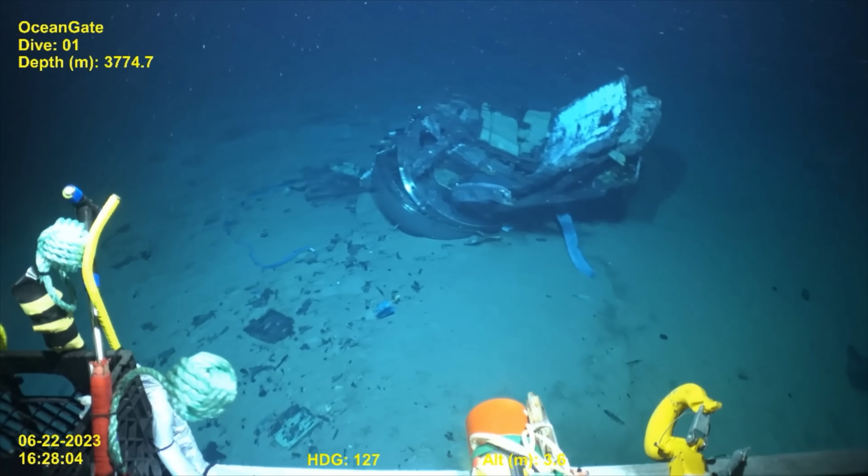He wanted me to be the pilot that runs the Titanic missions. And I told him I'm not getting in it. Hard to believe it's already been over a year since the OceanGate Titan disaster, and now we have hearings from the Coast Guard with key witness testimony from people involved, and we've learned a ton.

Now, I want to focus this video on the testimony of Tony Nissen, who's the chief engineer of the Titan program. And a lot of what he's had to say is pretty shocking. Some of it we knew, some of it is new. The reason why we're doing this video is because it's really important in engineering, whenever something goes wrong, to learn how to address it, because that's how progress is made. So let's see if we can figure this out together.

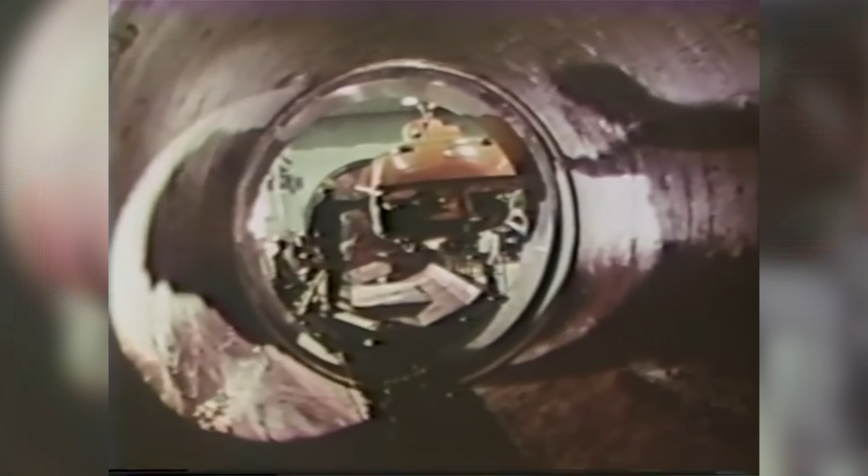The next key point is testing at the Deep Ocean Test Facility in Annapolis, Maryland, something that they were going to do, but ultimately did not. We wanted to hydrostatically test, so we wanted to fill it with fluid, but there was going to be computers inside because we had to measure data and they needed to isolate that from the water. And the Deep Ocean Test Facility wasn't comfortable with us doing that.

I submitted a plan, a request to be able to do this. They came back with, we don't know if we want to do that. This is one of those cases where Stockton got fed up and said, then we're not going. And it was going to push us like another year. Like I couldn't get it done fast enough.

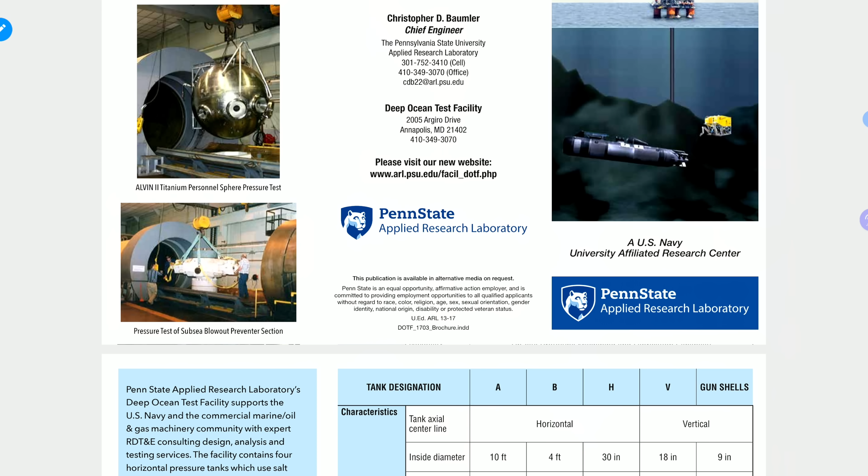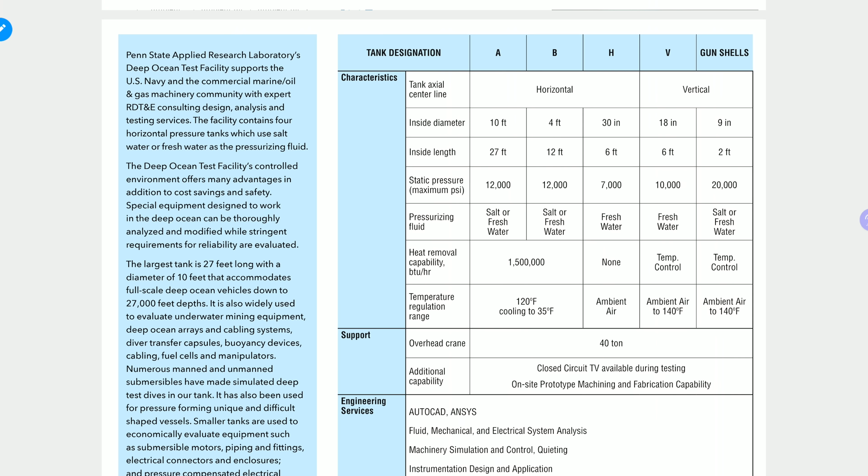The Deep Ocean Test Facility is exactly where this sort of testing should be taking place. In fact, the US Navy has performed testing of this variety for this very reason, and they did not. And they claimed that because of their instrumentation and computers, the facility had objections to doing a hydrostatic test. But that doesn't really make all that much sense because, again, this vessel, this pressure vessel, one of the largest in the world, is made for exactly this purpose.

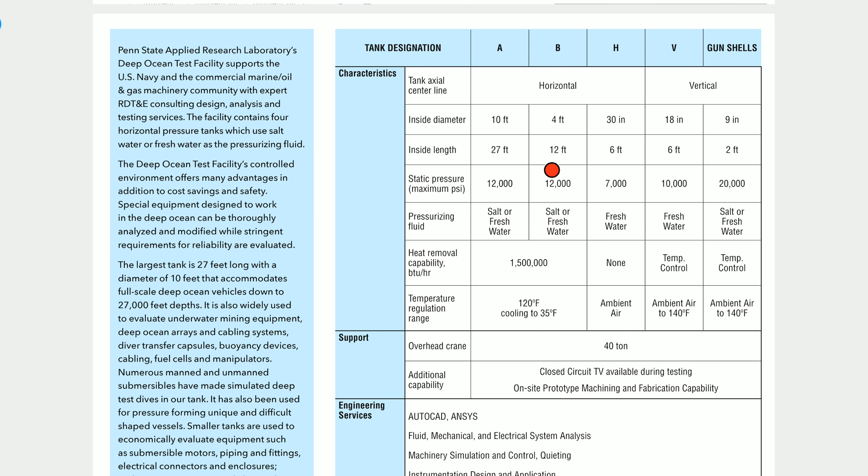And as you can see, they support static pressures of up to 12,000 psi, which is plenty. And they even allow for fresh or salt water during their testing. So they could have taken the Titan, put it in there, ran it at 5,500 or 6,000 psi, which is about what they would have seen at 3,800 meters at the Titanic, and done some tests.

This is really important because one of the things that you can never fully predict in modeling is how these sorts of systems will fail under pressure and depressurization cycles. Aircraft pressurize and depressurize the cabins to make sure that they can withstand 10,000 flight hours, whatever the number might be. And the same thing really needs to be happening here.

Now, if they were going to devise the Titan to be a one-time use craft, that's different. But we'll get to this here in a minute, why all their countermeasures or their protections that they built in to detect any sort of issues would have been insufficient.

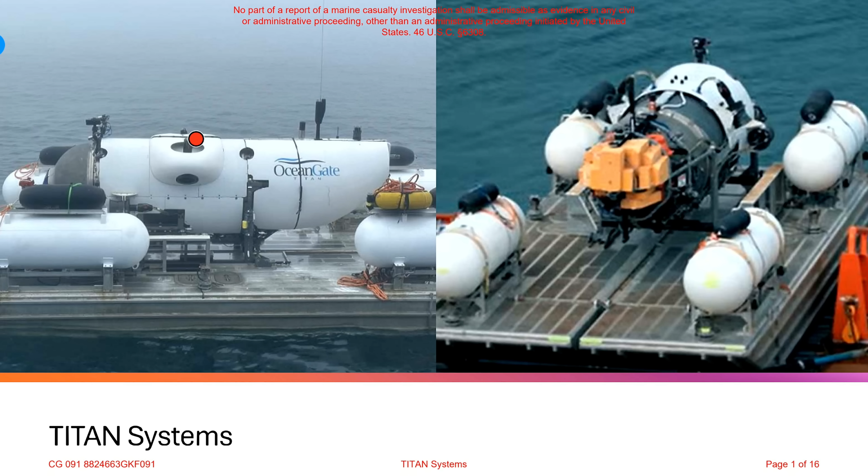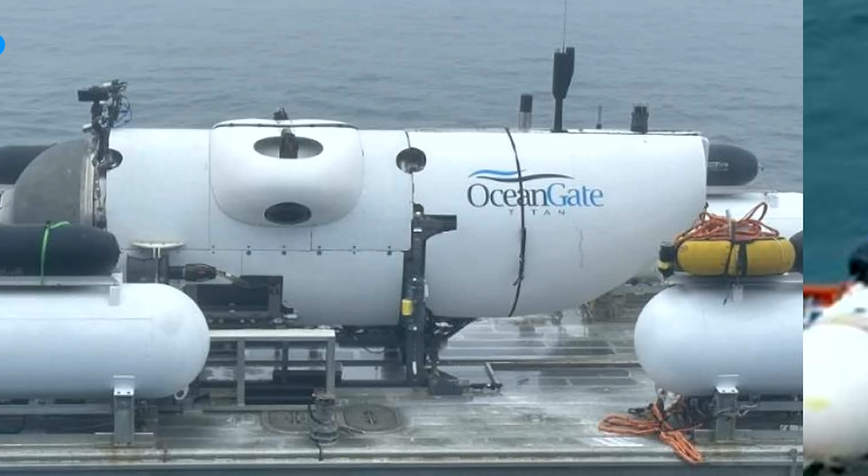The DAR predicts failure to be hoop failure on the inner surface at the center of the cylinder at about 2.21 times the design pressure. And in their testing, what they found is that the pressure on the hull, this here in between the 2 ports of titanium where it's held, the maximum deflection would happen right here in the middle. And around that area, they were seeing deflections 37% higher than they expected. Now that's always going to be troubling, and it was just another one of those things that didn't add up while they were doing this testing.

Now this is on their earlier hulls during their testing and evaluation cycles back in 2018. We hadn't really gone deep enough, long enough, and we were flexing 37% more. So it was the first warning.

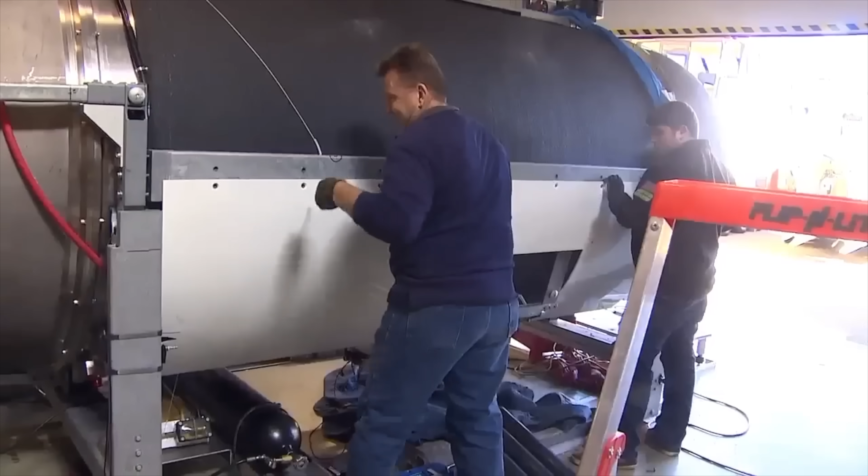Now, for something like this, it's really important to be able to do a visual inspection or any other kind of non-destructive testing before going out onto these expeditions. But part of that was a challenge because the outer casing is covered in basically like a rhino liner. It's a sort of tough and hardened outer shell to protect the carbon fiber on the outside. And on the inside, there's an inner liner. So one of the questions that Nissen was asked is, how easy was it to actually get in and how much of it could you actually see? And the answer was really not very much. It was only really close to the titanium rings where the carbon fiber was mated.

So Nissen flies out to the Bahamas during this testing, verifies the crack and says, yeah, this hull can't be used. Now, OceanGate claimed that they were scrapping missions that year because of a loss of the support vessel, which was not true, but they were just trying to save face at that point. And then he was fired shortly after in June of 2019.

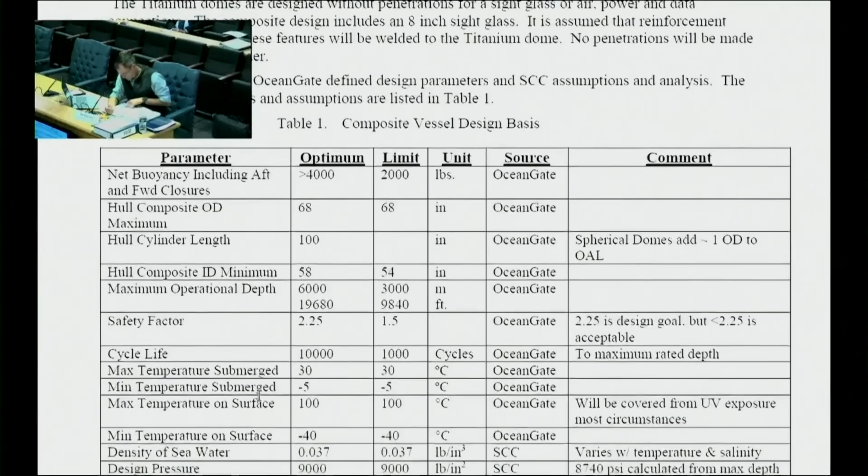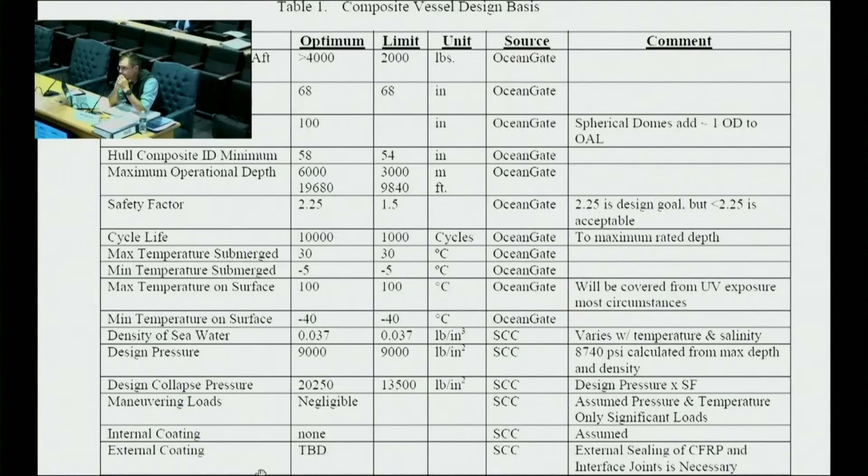The optimum cycle life was 10,000 cycles to maximum rated depth, and the limit was 1,000 cycles to maximum rated depth of 6,000 meters. Do you believe the Titan Hull 1, before testing began, would have been able to withstand 1,000 cycles to depth? No. As you're aware, the Titan Hull 1 did not complete even 3 cycles to a shallower depth than 6,000 meters without having a crack in it. Where do you believe the gaps between the analysis and the real-time testing occurred? It got hit by lightning. You would have thought that it would do better performance than that when you have a safety factor, like you just mentioned. That margin is huge.

Nissen even claims that the hull was struck by lightning while in the Bahamas, and that could have attributed to the crack and other issues. But that's not 100% verified. I know your presentation says alleged. That is a difficult thing to prove, except I had to drag a lot of my engineering team down there to replace all the electronics in it, and I could find all the lightning traces.

Then there's the viewport. So on the front nose cone, there is an acrylic viewport, and Stockton Rush was very adamant that this be very visible, be big enough for a human head to fit into for maximum viewing. One of the red flags that we reported a year ago was that this viewport acrylic was only rated for about 1,300 meters, not 4,000.

Will said, I'll make it for you, but I'm only going to cert it to, I think it was 1,300 meters. Stockton said, fine. Neat thing about acrylic viewports is they do a very good job of telling you when they're failing. You'll see crazing, which is like microvoids in the fibrils, and crack growth. And you can see that visually before it's too late, ideally. And he also mentioned concerns of cold flow or creep, which is a slow deformation in a material that is exposed to high stresses for a long period of time.

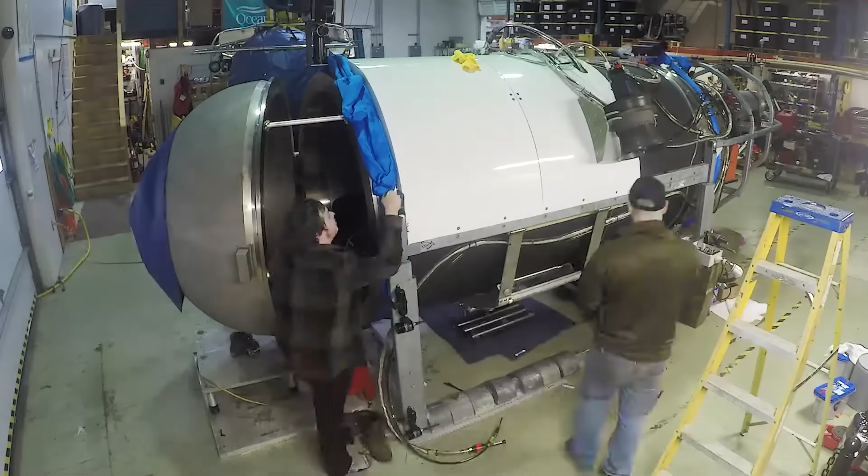And so this gets to one of the great challenges of engineering, which is at the interfaces. On the Titan submersible, we have a couple of different interfaces. First is the acrylic viewing port to the titanium dome. Then we have the titanium dome to the titanium ring to the carbon fiber hull. And that's kind of repeated on this side as well, if you could imagine. Those are the points where issues are going to be likely to happen.

And the reason is because the modulus of elasticity, which is the stress over strain, meaning if I push on something really hard, how much does it shrink? Or if I pull on it, how much does it stretch, is different for different materials. So titanium and carbon fiber aren't going to be the same. Now let's say this is the carbon fiber here, and this is the titanium. And so this then would be the mating surface. That's where the glue is being adhered to.

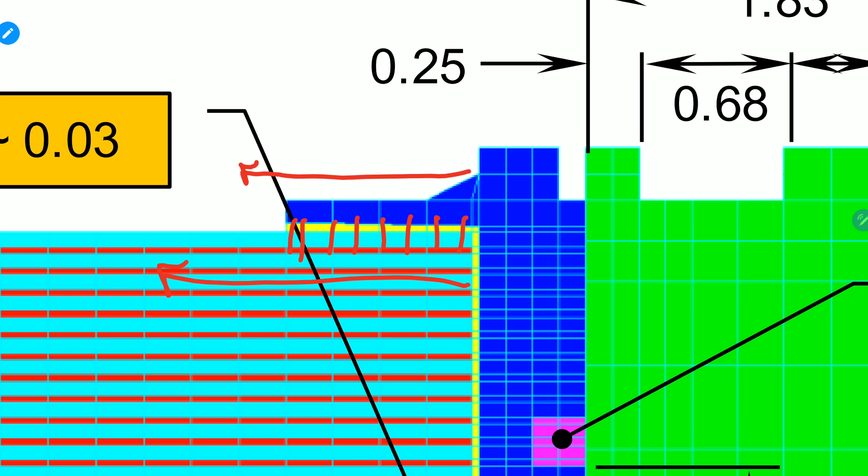But if I pull or push on this titanium and carbon fiber separately, maybe the carbon fiber moves this much, but the titanium only moves this much. And so that means then that this glue surface is going to start to have some shear applied to it. And this happens over and over with every pressure and depressurization cycle. So that might have potentially been a cause of the issue.

And it's not just the modulus of elasticity and other material properties. How about thermal expansion? When the Titan is up on the surface, it's being hit by the sun and it can get really hot. It could have components that are over 100 degrees Celsius. And then in the deep oceans, it's really cold. So all different materials also shrink and grow at different rates based on temperature as well.

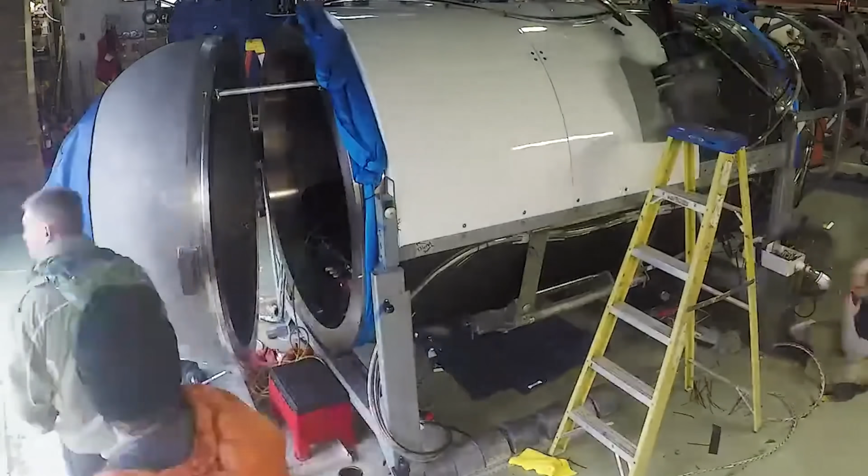They also mentioned that they went from grade 5 titanium to grade 3 titanium, which is very notoriously difficult to work with. Titanium is incredibly strong per unit of weight, which is what makes it so great for aviation and other applications like this. But grade 5 titanium, according to their reports, was going to be too expensive and take too long. Plus, the stronger the titanium, the harder it is to machine. So it's not just that the material costs more. Machining these parts is increasingly difficult. You need much more delicate machinery, harder bits, and everything else.

Next up, there were questions about their monitoring methodology. Now, they had an acoustic system, as you can see here. They have this string of acoustic sensors about 120 degrees apart around the entire circumference of the hull. And the idea is that it was listening for what would sound like breaks. Imagine if I took a piece of metal or steel and bent it or broke it, that sound of fibers breaking, these mics would pick up and it would report. The idea was that if there was any kind of breaking or yield starting to happen in the carbon fiber, for example, they would be alerted and they could abandon the mission and surface.

But that wouldn't matter if the catastrophic failure onset was instantaneous like it was in this case, right? It wouldn't matter if you got a little audible warning, you wouldn't be able to take action because the entire pressure vessel would implode, which is what happened.

My final question is, would you have felt comfortable as the director of engineering going down in the Titan submersible, specifically hull 1 to full rated depth? That's almost the best question here, isn't it? Stockton's and my relationship started to turn sour. He wanted me to be the pilot that runs the Titanic missions. And I told him I'm not getting in it. And he asked me why. And I said, because the operations crew, I don't trust them. But I didn't make it any easier with the following question. He said, well, what if I'm mission director? I said, you still have the same operations group.

So these are different teams that work on different parts of the process. And he apparently didn't trust the operations team to really know what they were doing, to trust his life with it. And he also was very adamant that they used the word experimental in their waivers and made them put that in. That way people knew that you're getting on an experimental craft. This is not like flying on a Boeing 737 that's been in flight for 4 decades, right? This is new. So now let's talk about what we probably think happened exactly.

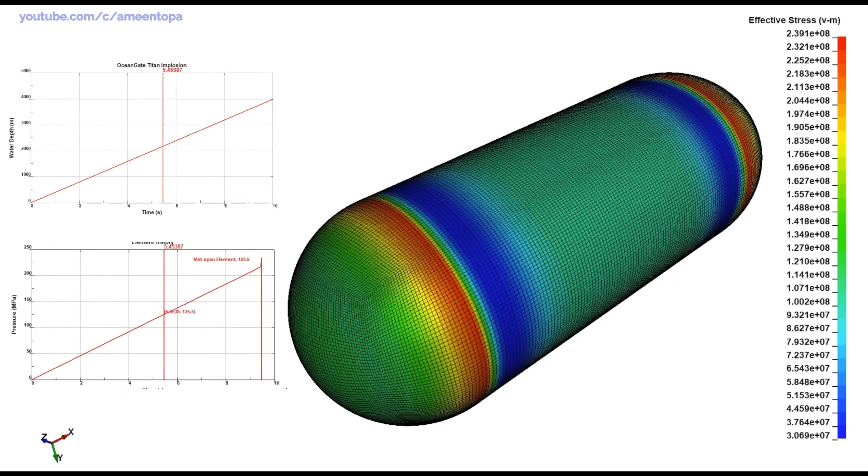So this video here is an animation, and we'll give credits to where this is from in the description. But this animation shows that a failure is likely to have happened right here in the middle. And the reason is because that's where the maximum deflection is, right? If you pin the carbon fiber here and here, then right here in the middle would be where the maximum deflection would happen.

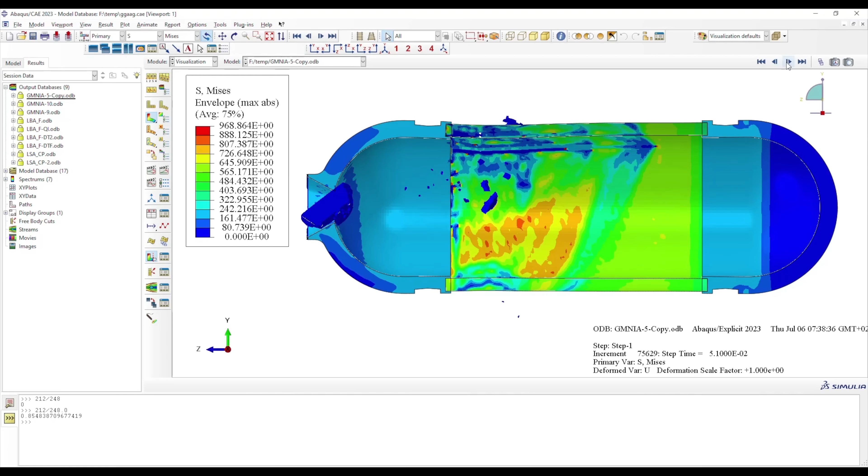So you might be wondering, why is that tail cone in such good shape? I kind of had that thought for a second. I mean, this is imploded like a tin can. It wouldn't look like that. Well, remember that this part isn't part of the pressure vessel. Only the carbon fiber hull and the 2 titanium domes on either side are. That was the part that was actually pressurized. This part would allow water in and it didn't have to hold back 5,500 PSI like the rest of it.

So as a result, when this crumbled, this probably broke free and this settled out on the bottom of the ocean floor, as we see here in the video. One of the early theories was that this imploded from right in the middle. But if that were to be the case, then there'd be equal amounts of wreckage on both the aft and the forward parts. And that wasn't what happened.

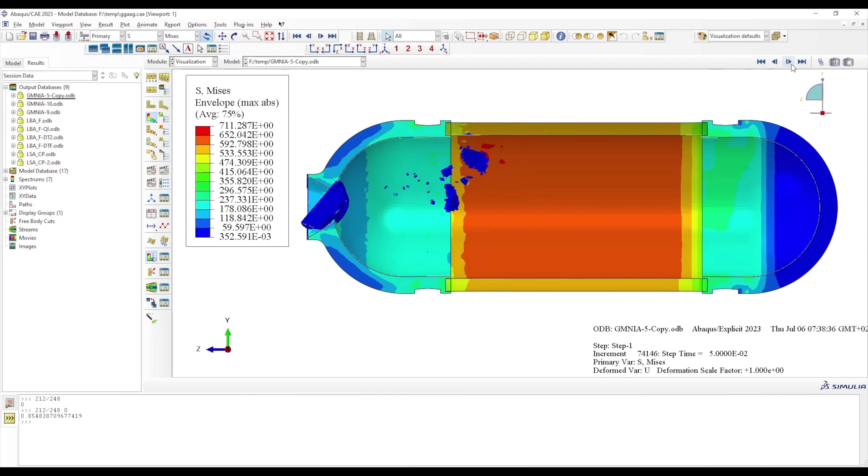Also, another theory was that the acrylic front viewport had failed because it wasn't rated for beyond 1,300 meters. But if that had happened, then you would have had a huge rush of water coming in, and it would have probably pushed out instead of imploded upon the vessel.

But most likely it failed somewhere in the front. The carbon fiber to titanium ring component failed and started to crumble, and the failure propagated backward, and the front separated more quickly, and it all settled out in the bottom of the ocean, and the tail cone was the most intact.

We do need to dwell on these things. I know this is a very uncomfortable story, that life was lost, but we as engineers learn from our mistakes. These kinds of mishap investigations are what brought us safe aviation. Many, many test pilots in aviation lost their lives over the years to various airframes. And then from each one of those failures, we figured something out. We've identified things, and then we build them into our standard operating procedure.

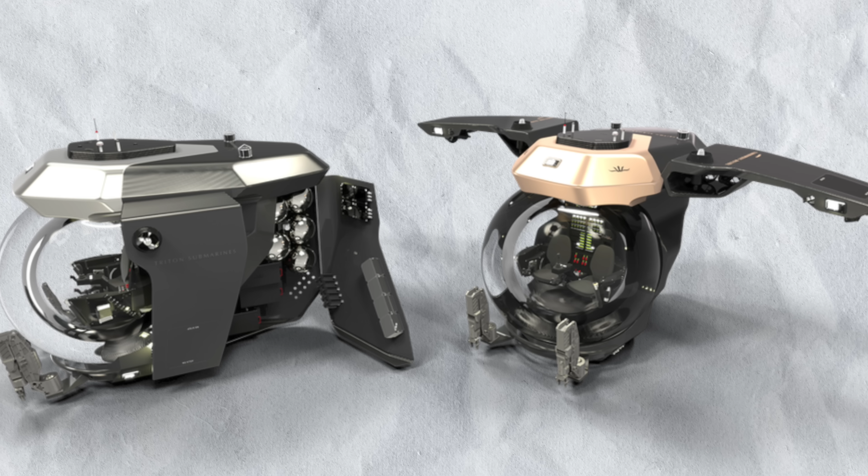Now, this is a frontier, and we're not going to stop doing it. Human beings love a good thrill. Now, would I ever get into a vessel and go visit the Titanic? No, I'll watch it on my computer. But for every one of me, there's also a person who would do that. And we already have the next generation of people doing this, right?

We have the Triton 4000, which is the next level submersible being built by billionaires to do this exact mission. Now, they have a different design. It's much more of a sphere, less of a cylinder, and it only carries 2 people. But the point is, we're going to keep doing this, and we should learn from what we can and keep making things safer.

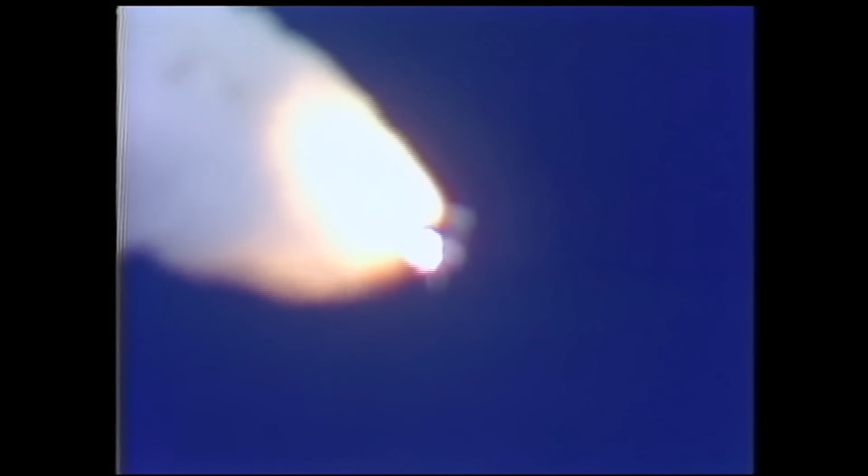There's a long-standing engineering precedent of engineers voicing concern and people saying, don't worry, it'll be fine. We'll just do it anyway, right? Like Challenger, for example, in the 1980s, when the company Morton Thiokol was in charge of some of the O-rings, and there was an engineer that kept saying, hey, we shouldn't do this. These O-rings don't really seal at lower temperatures. This morning at the launch site, it's colder than we thought it would be. Bad things can happen, and literally exactly that happened. So maybe the first lesson we can learn is let's listen to our engineers, especially when it's uncomfortable news.

We have a lot more to go, but I think it's really important to remember that in engineering, we often learn from mistakes. That's the only way. How else do you go from never having flown to going and flying? How do we go from dangerous treks to watch the Titanic wreckage to daily trips that are safe and have no rate of incidents? Well, through continued learning and humility, right? What we're doing here is incredibly unsafe.

One of the comments in my previous video mentioned that for an airplane or a spacecraft to go from landing on Earth to outer space, they go from 1 atmosphere to 0, right? This is from 14 psi to 5,500 psi, like 300x the depth and pressures.